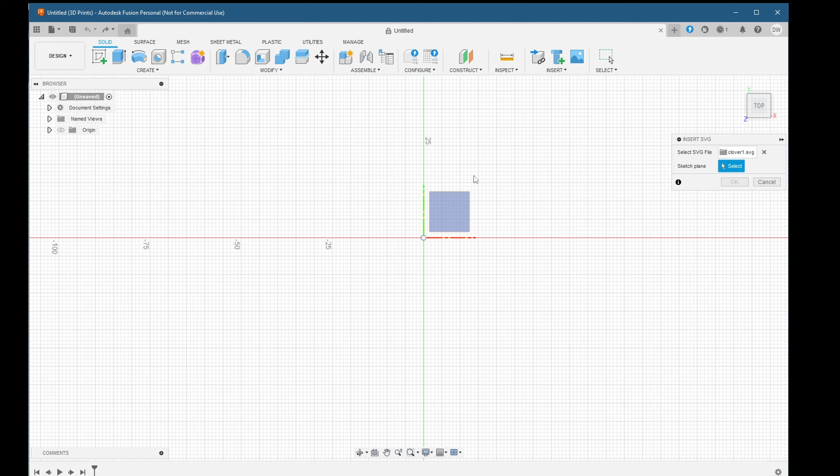Now it comes in nice and big. We're going to scale it down, and we want this to be, I don't know, about 95, 90 or so. So let's actually zoom out a little bit here. Let's scale it. Okay, this looks about right. And let's go ahead and click OK here.

And now we can begin our extrusion. So we're going to open up our sketch here, make sure we understand where things are. We're going to select everything. We're going to hit E for extrude. And we're going to be extruding it, let's say, -3.

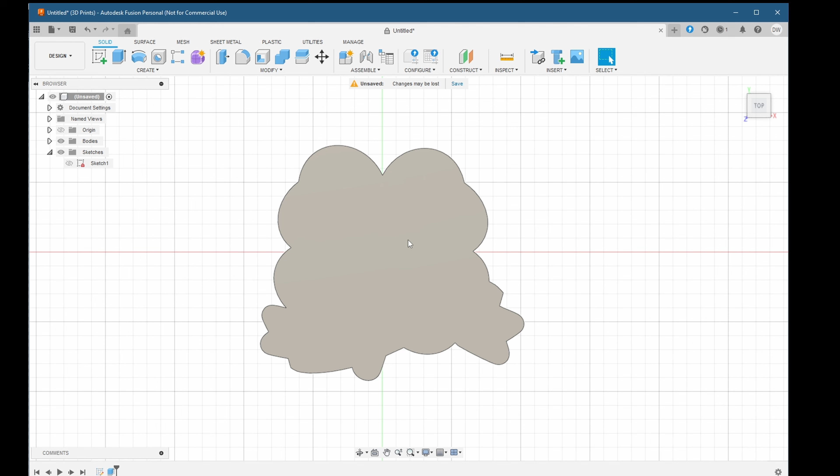And we want to pick new body here. Click OK. And that's going to give us our base. We go ahead and get our sketch visible again. And now we can begin extruding our pieces.

So there's a couple of ways we can go about this. First, we can do it the usual way, where we extrude everything to the same height, which allows us to print this face down. And that will give us a nice even surface with very little defects.

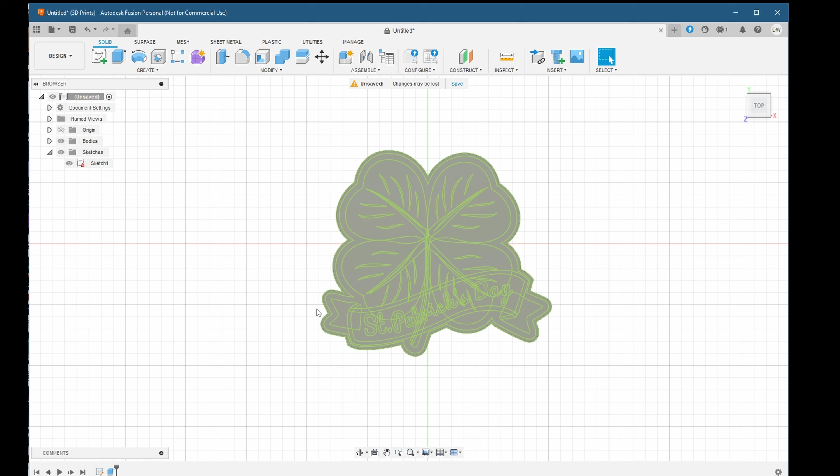The other way is that we can create a lip using this outer edge. We can extrude that further up, which will give us a border so that our drink or cup doesn't slide off. The trade-off here is that it will have to be printed face up, which will expose some of the 3D printing imperfections. What we can do to offset that is use ironing and try to get the top surfaces smoothed out. Let's give that a shot and see where we land.

Let's select that outer edge and extrude 3 millimeters up. Make sure this is on New Body, and we'll click OK. The rest of the surfaces are going to be extruded 2 millimeters. Let's begin by selecting all our elements and extruding those up.

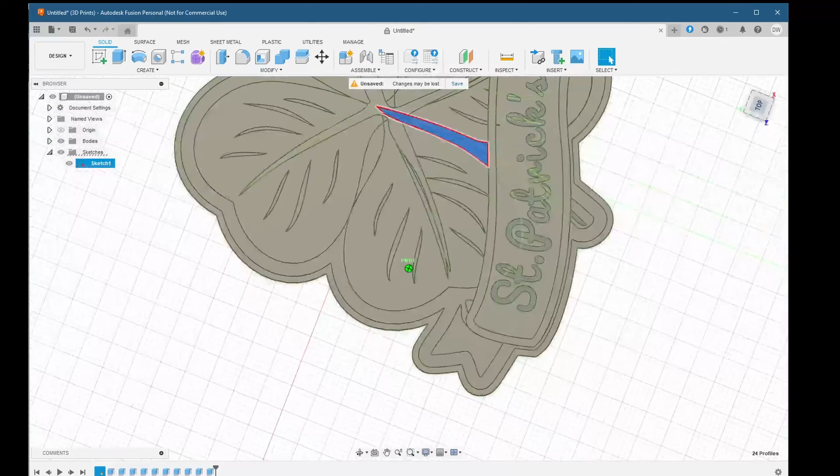Okay, looks like we're done here in Fusion. Now we can save this, export it out as an STL or a step file, and bring it into Bambu Studio so we can start assigning colors.

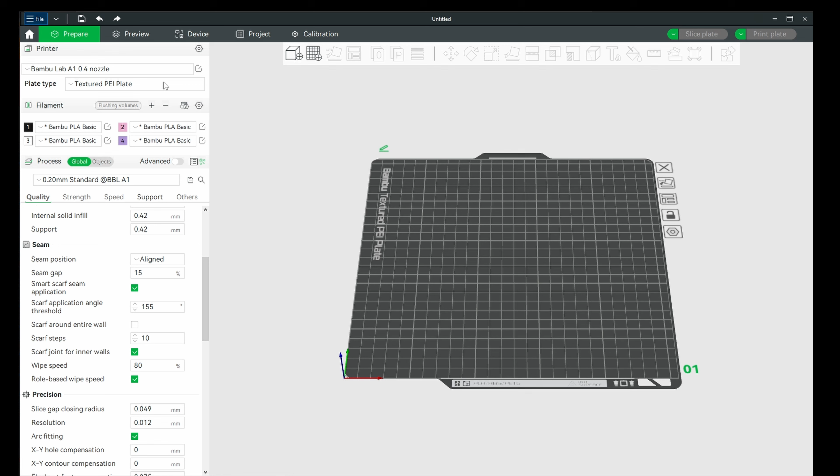Now that we're here in Bambu Studio, let's bring in our model and start assigning colors. It brought it in as one object, which is interesting. Normally it gets split out.

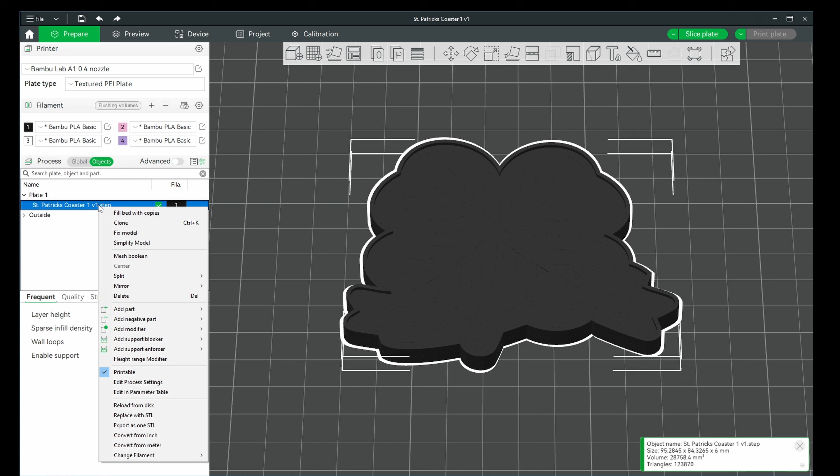So what we're going to do is right click on that, and we're going to do split to parts. And that brings us back to where we originally were in Fusion, where all the parts are split out. And we can start assigning colors one by one.

Now what I'm going to do here is change the colors on this filament list to the ones that I'm going to be putting in a little while.

And there we have it. Now our coaster is looking pretty good as far as colors goes, but what we want to try to see if we can do is smooth out that top.

So for that, we're going to go to the quality, and then here we go to ironing. We're going to select top surfaces. We're going to change the ironing speed to 15, and we're going to change the ironing flow to 20%. And from here, we're ready to print.

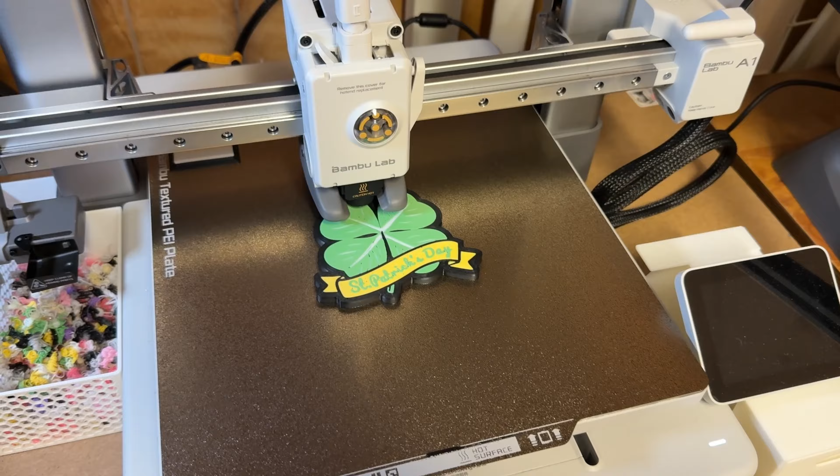Okay, here's our finished product. You can see there's some lines where I might have missed the extrusion, or perhaps it was too detailed for the print head to make such thin lines. I'll have to take a look at the model and print settings, but you can see how nice and smooth our surface is due to the ironing settings we used.

Now let's go see our coaster in action. This is perfect. Maybe a little too small for a pint glass, but great for a bottle.